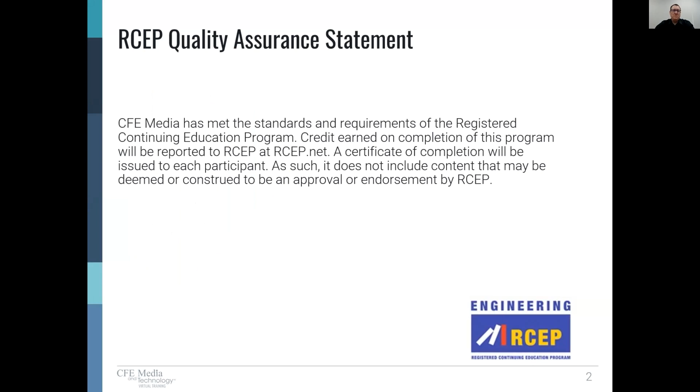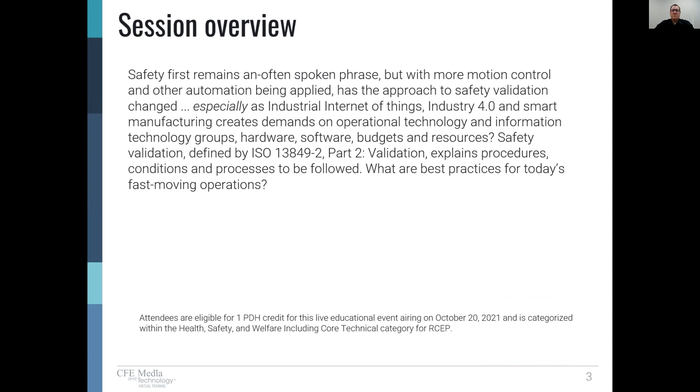This session is designed for technicians and engineers who want to understand safety as it relates to industrial automation and motion control, validation, procedures, processes, and best practices. Here's a list of learning objectives. We'll touch on these in today's presentation.

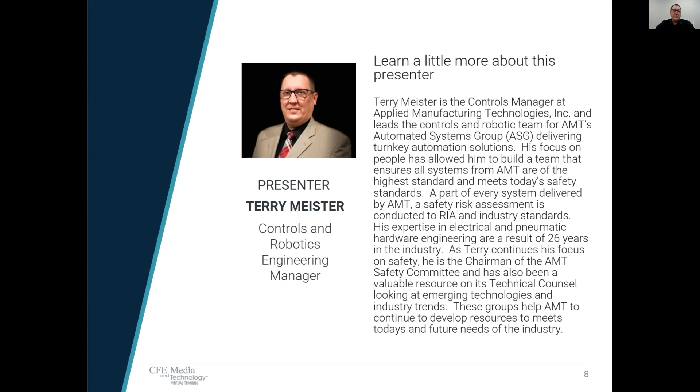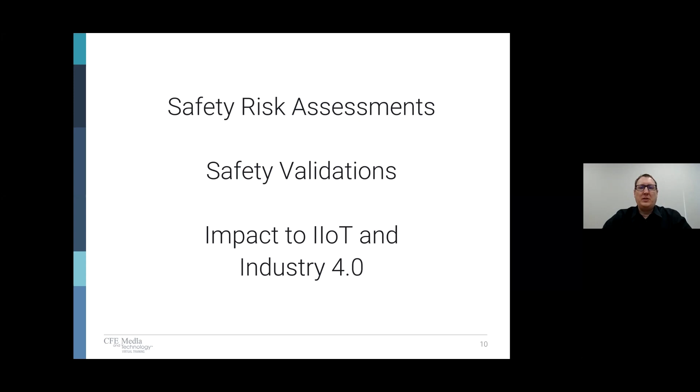Today, we'll be discussing three main topics: safety risk assessments, safety validations, and the impact to IIoT and Industry 4.0. So to get us kicked off, first, let's talk about the safety process to begin with. When we want to maximize safety, really we find that there's 5 different categories that people fall into, or companies, if you will. They're complacent, combative, which is not a good thing, competitive, cooperative, or collaborative.

What do we mean for a company that does this? Well, the first one, complacent. Really, most or all of the people at that company don't recognize safety as an integral part of the process. And what we can see in today's society, there's very few companies today that would fall into category 1. Most understand safety to a certain extent and understand the need for it.

We think of a combative company. Now, they're quick to dismiss or argue that safety is a hindrance. So it's stopping the process. I still have a product to make and I need to get it out the door quickly. Well, those companies are few and far between as well. Now, competitive. When we look at a company as competitive, they're quick to discount safety within their own process.

Now, most companies fall within the 4th or 5th category. The 4th one, cooperative, which is good. These ones understand the need for safety. They may not understand totally how to implement it, but they understand that there is a definite need. And the 5th one, where we all want to be, collaborative. They understand the benefits of safety, and they are in full implementation on their systems and machines.

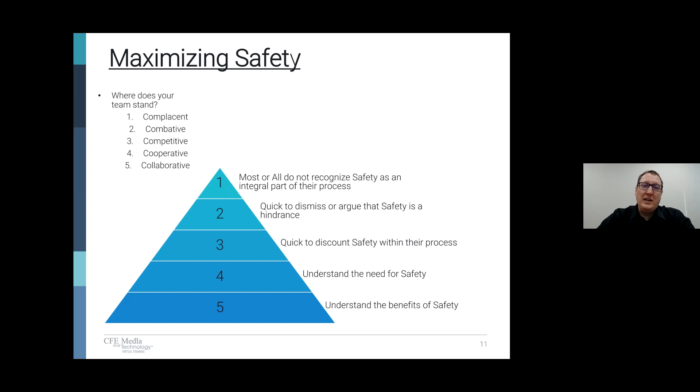So as we discuss the first part, safety risk assessments, why are they important? We're going to discuss who should be involved in them, the terminology that goes along with risk assessments, the procedure that needs to be followed, and documentation.

Now, you're going to hear the word documentation several times today, and we're going to emphasize it because when it comes down to risk assessments and validation, documents are an important key that all of us need to keep in mind. And really, it's the proof that we've done our due diligence to make sure systems are safe.

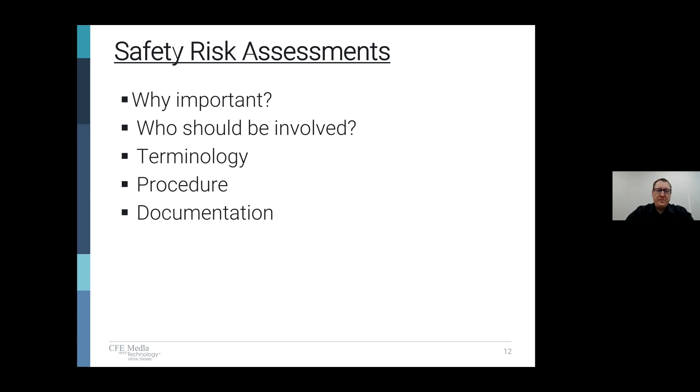We think about safety not just as a piece of the engineering or a piece of that machinery. We need to think about it as a whole solution in the life cycle of a system or a machine. Here's 5 steps that we put together that we try to follow on all systems that we want to engage in. The first step is the risk assessment. That's going to give us an understanding of what level we need to protect the operator or someone interacting with that machine from.

Then we move into the functional safety. So that's the design phase, when we're designing mechanically, controls-wise, electrically. What functional safety needs to be there? It needs to be discussed in step 2. Step 3, we need to mitigate the risk. There's a risk on many machines and systems. How do we mitigate that so we're keeping people safe?

4th, this is a very important point, but many companies miss it: validation. A lot of companies have the risk assessment, their design, their mitigation. It's very clear. They're intentional about what they do. But when it gets to validating, well, by that time, the system needs to be out the door, and they really don't validate the system. We'll discuss why that's so important further in this presentation.

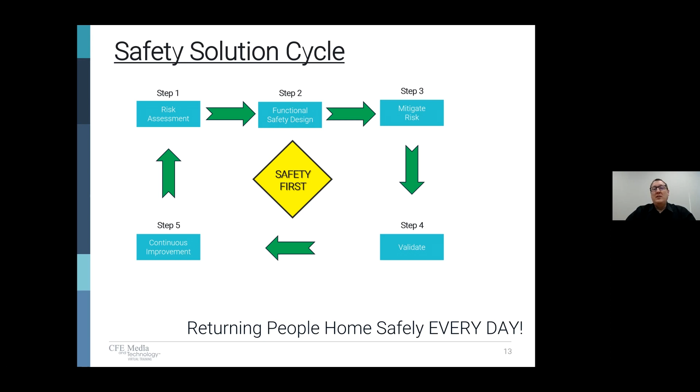Really, our goal is all the same, isn't it? If we're here listening to this, we're concerned about sending people home safely every day so that they can live an enjoyable life and that they don't have consequences from what happened at work on a particular day.

A lot of people wonder, though, about the risk assessment. As we get into the details, you'll see it's in-depth and it takes time. So why is it so important? Well, this enables us to have a systematic analysis and evaluation of the risk associated with that system over the whole life cycle. Now, when we say whole life cycle, remember, a risk assessment isn't just for an operator. We need to look at the risk associated with a machine or a system, all the way from when we think about building it on our floor, when we're programming it, when it gets to the customer, once demolished. All of those things need to be considered in a risk assessment over the whole life cycle.

And it gives us an approach to be able to do that methodically so that we can catch all of the risk. Really, it also allows for an impact on supporting the coworkers. The more that we get workers involved in a risk assessment, the more buy-in that they have. And again, the goal is to send everybody home safe and sound. That risk assessment gives us the first step in being able to make a safe solution.

Who should be involved in the risk assessment? Oh my, this is a big debate sometimes, because the more people you get involved, the more money that is spent on it, right? However, the more people you get involved, the more buy-in you have. Sometimes we'll see a designer who's in charge of the risk assessment, but he's the only one involved. Really, that's not the best practice. The best practice is to have anybody that's going to be involved in the design or the implementation or anything revolving around that system involved. So the integrator, the machine builder, the designers, the end users, even the operators and the maintenance personnel.

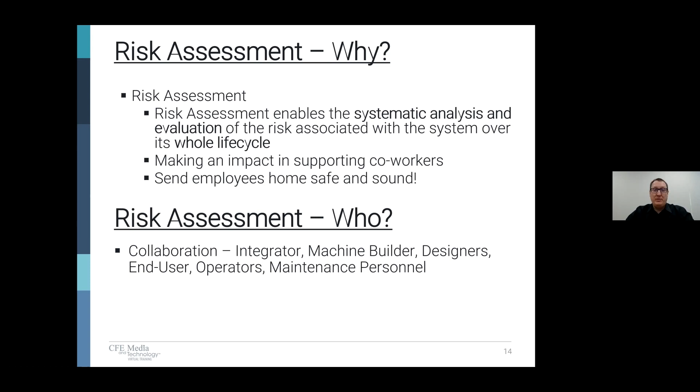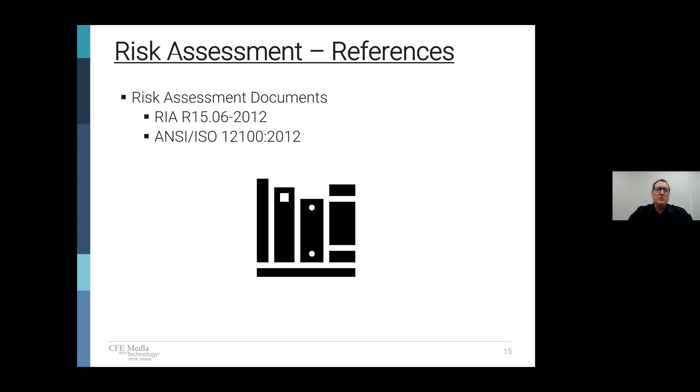When we think about risk assessments, we have standards that really give us principles along the way so that they can guide us to building a safe system. Two of those are the RIA R15.06-2012, that's for the robots and the robotic systems, and ANSI ISO 12100-2012, which also gives us a basis for risk assessments. So those two documents, if you don't have them, we encourage you to get them because they're going to give you those principles that you need to base your risk assessment on. How do you build it? What principles are used in doing so? Those are going to give you the guidance that you need.

When we think of the strategy for our risk assessment and risk reduction, we think of it as 5 different pieces that we need to work through. We see here A through E. First, A, determine the limits of the machinery, which include the intended use and any reasonably foreseeable misuse thereof. That's an important catch, isn't it? If we think of just an operator interacting with it every day, we can protect that. But what about the reasonable foreseeable misuse?

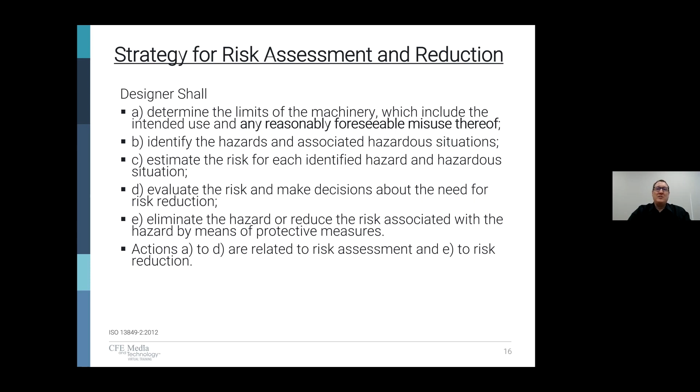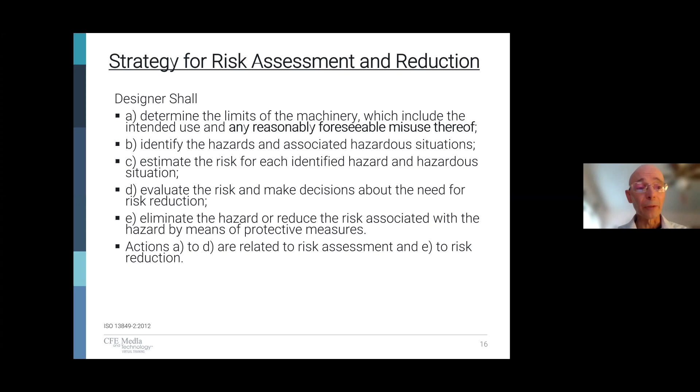Terry, there was a 10-second spot there where you dropped out. I'm not sure why that happened, but if you want to back up to the beginning of this slide and start again, that would be great. No problem. The last time I stopped a speaker for that, it was just on my end, and it recorded just fine. So this may be for naught, but we don't want a 10-second gap. No problem. So I quit sharing, sorry. All right. I'll go back one. Come on. You're doing great, by the way. Oh, thanks. Okay, yeah, there we are. Wait a second. There we are.

Okay. So when we think of the strategy for a risk assessment and reduction, we have really 5 different ways that we do this as we look through the process. We have A through E on the screen. So when we think about A, determining the limits of the machinery, which include the intended use and any reasonably foreseeable misuse thereof. Now that's an interesting catch, isn't it? When we think about reasonable foreseeable misuse, what does that mean?

Well, imagine you have a plant and all of the gate switches are the same and they require the old hard key that fits in every single gate switch. Now, if an operator or a maintenance person has one key that can fit every switch around that whole area or a plant, well, really that's reasonable foreseeable misuse. So we need to protect against that, don't we? We want to make sure that if someone intended to, they could not easily bypass a safety device.

B, identify the hazards and associated hazardous situations. That's an important one. We're looking at what are the dangers there. C, we need to estimate the risk for each identified hazard: what is the risk level? And D, we're evaluating that risk. And then we need to make decisions based on what we see for the risk reduction.

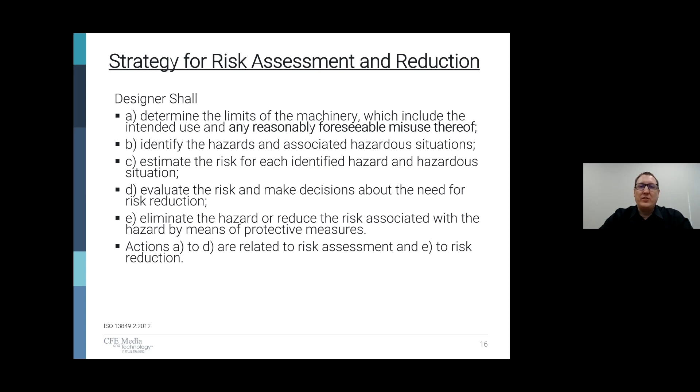And then E, we're eliminating the hazard and reducing that risk by means of protective measures, like safety fences, safety devices, laser scanners. There's a lot of different safety devices that can do that. So actions A to D are really related to the risk assessment, but E is related to the risk reduction. So what does all that mean? This is kind of straight out of the specification of ISO 13849-2. How do we interpret that?

Well, in this slide, we see those 6 steps in a little more detail. Step 1, determining the limits of that system. We need to identify the equipment and the intended use and reasonably possible misuse of that equipment. That seems sensible. We're walking through the process. How is the operator or maintenance person interacting? Step 2, we need to identify those tasks or hazards where they're interacting with that system. Step 3, we need to evaluate and assess the risk. So we look at a task or hazard in step 2, and then the risk involved in it. How badly can a person be injured?

In step 4, we want to identify the risk reduction countermeasures that are going to make a basis for how we protect that operator. In step 5, we mitigate that risk. We put the learning from step 4 into practice and mitigate it with those countermeasures that we decided on. And then step 6, we verify that the risk meets the acceptable level. What does the acceptable level mean? We'll discuss that in just a few moments.

But really, this is the life cycle of a risk assessment that we want to keep in mind. And it's good to have this each time we start a system. We want to make sure as we discuss a risk assessment that we're doing each of these steps. It'll help us get in the habit of being able to think and reason on these principles.

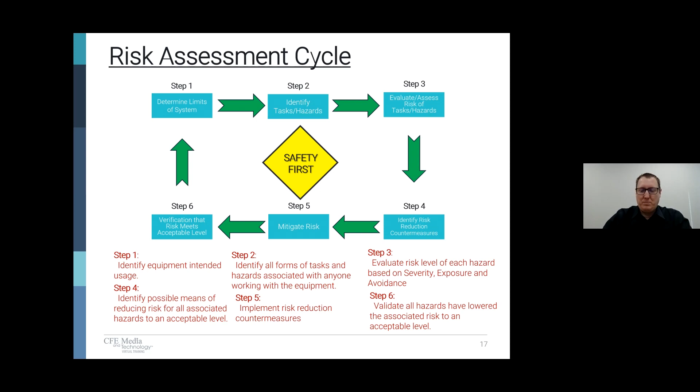These are those 6 principles, again, that we're following. And as we mentioned, who needs to be involved? We see on the right side, resources and input we kind of already discussed. We want the end user, the operators, the maintenance. Understand though, even on an engineering side, we want more than just the mechanical engineer or designer. We want controls input. We want simulation input. We want the programmer. If there's software, we want input from him. All of these can be part of that nice group that we're coming and collaborating on this risk assessment.

Now, we also want a knowledgeable safety officer, right? Because really, if we have a lot of people that don't have the experience of safety just in a room discussing it, they're not going to understand how to apply the mitigation. So we want someone who is an expert in safety that's going to help us get to that next step of providing a safe system.

Always keep the tools handy. We mentioned 2 of those specifications, but also understand the specifications do not give you the documentation you need to fill out as you work through a risk assessment. It gives you the principles and standards that you need to create that document out of, or you can purchase risk assessment software as well. But you still need the expert because he's going to help you put the input into that document or that program that gives you the good output, that gives you what you need to meet as far as a risk level.

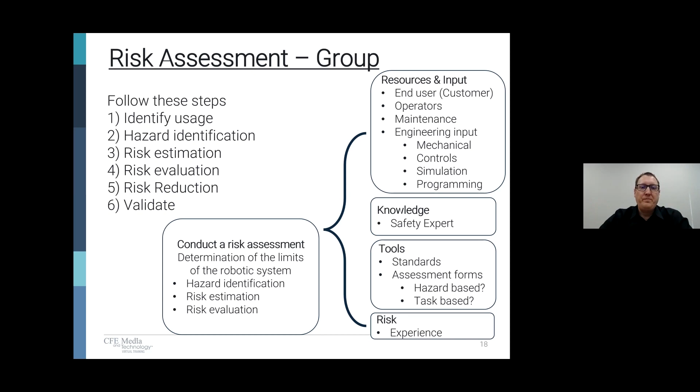I work for a robotics company. So we've taken the RIA and built our risk assessment off 1506. We decided to use a task-based risk assessment. And there's some terminology that we want to discuss before we show you the ideas and some paperwork that we've created that'll help you understand the process that needs to be taken. First, we've mentioned it several times, the task. Yeah, that's a piece of work that's done or undertaken. That's a given, right?

The hazard. Now, understand the difference between the hazard and the risk. The hazard is actually the potential source of the harm, or that piece that's going to create physical injury or damage to your health. The severity. Now we need to look at, if we come in contact with that hazard, how badly are we going to get hurt? Are we talking about a pinched finger, or are we talking about a broken bone? Or, of course, the worst thing that could happen, death.

What about the exposure? This is an estimated incidence of the operator being in the presence of that hazard. So an operator may interact with that hazard maybe once a day, maybe a maintenance person once a year. Maybe an operator is interacting with that hazard 60 times a minute. All of this is taken into account when you're looking at your risk assessment. What about the fifth one, avoidance? Now that's our ability to sense and elude the hazard if we're in the situation where we need to. How fast can we look at and react to it?

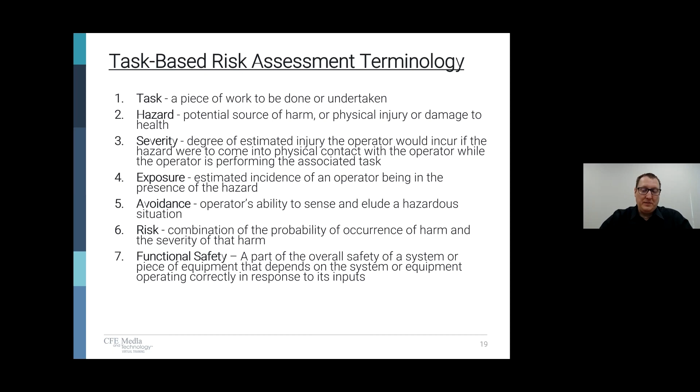So now we're going to discuss some of the documents that we've created that help us walk through a risk assessment. And again, as a company, you'll either need to create the documentation or you'll need to purchase a program that helps you do so. But either way, you need the background knowledge and understanding of the principles. So we start with a cover sheet. Think of someone that hasn't seen the risk assessment yet, but understands the idea of the system. They pick up the risk assessment that you've done, and we want them to understand a little bit about the system.

So on the cover page, we define the system and the sequence of operations for them. This is not a detailed system overview or a sequence of operations. It's just a simple basis. If they were standing next to the system, they could pull it out, look at it, look at the system, and begin to understand the pieces. That's where the system overview helps as well.

Again, not detailed, but if we discuss a robot in the system, we want them to be able to see where the robot should be and see it in the system so they can relate the risk assessment to the physical machine. You'll also run into situations where you need to put down notes, determinations, assumptions that you've made.

These are very important because as you work through a risk assessment, there may be questions that come up and assumptions that you've made. Put those down in the risk assessment so the next person that looks at it and reviews it understands what you were thinking when you made a determination.

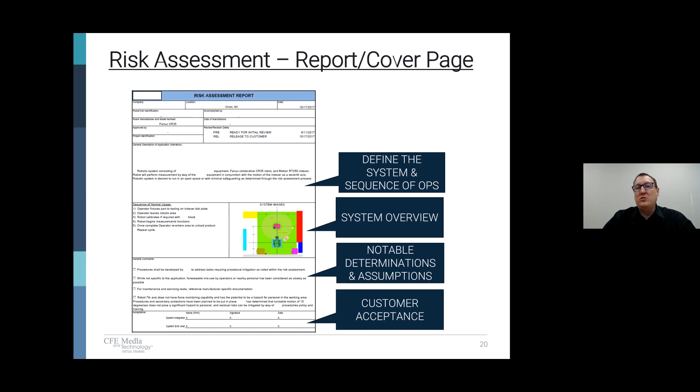The next piece that we look at is our tasks and our hazards. So as we look at a task, there's a lot of ways an operator would interact with a machine, but there's also tasks where, take for instance, a robot programmer. He's going to interact with that system. So in that system, how does he know he's safe? How can he make sure of that?

What are the hazards? When we look at a hazard, we want to make sure that we're looking at it without a safety system. So take for instance, a hazard of a robot. If we put a robot in an empty room without any fencing, and there sits the robot, it's an industrial robot, so it doesn't have any collaborative safety built in. What is the hazard that robot would really have? Of course, that would be high, and we'll discuss that in a moment.

But that's where we need to think of the hazard. Without any safety devices, what would be the hazard of that equipment? Because we're going to mitigate it later, we want to look at the potential hazard and risk. And as we look at the tasks one by one, we walk through. Again, this sounds tedious, but as you build the documentation, you can use it across several machines.

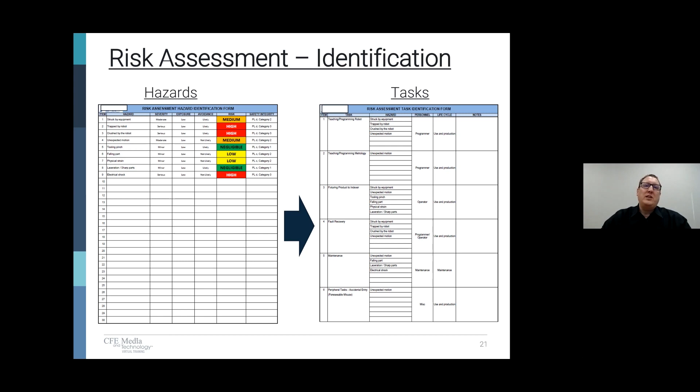Take, for instance, the hazards that we have. We have a list of normal hazards that are associated with robotic systems. So we can pick from those hazards which ones apply to each task. So as you build your risk assessment library, you're going to make it easier on you and the company and all those involved.

Then we move to the evaluation of risk. Now, this chart helps us to understand, looking at the severity, the exposure to the hazard, the avoidance of the hazard, and ends up with helping us understand what our risk level is. So let's take a robot again. I reference robots a lot because that's what I do for a living. But just as an example, take a robot in the center of a room. No fencing, no safeties monitoring anything around it.

What is the seriousness if you were to walk up to that industrial robot that can run maybe up to 3,000 millimeters a second? Well, I don't think you have to reason too hard to bring it all the way down, not minor, not moderate, but we're in the S3 serious category. You are going to get seriously injured. If you run into that robot, well, it runs into you, we'll say. So we have a serious hazard.

And then we look next at the exposure to that hazard. Well, for a robot without any fencing, anybody can walk up to it. So we definitely would say we're at E2, the high risk, wouldn't you? That exposure level is high. So now we have S3, E2 high, and then we look at the avoidance. Well, it's not likely that you're going to avoid something moving 3,000 millimeters a second. So we're going to go with not likely, A2, and that takes us into the risk level high.

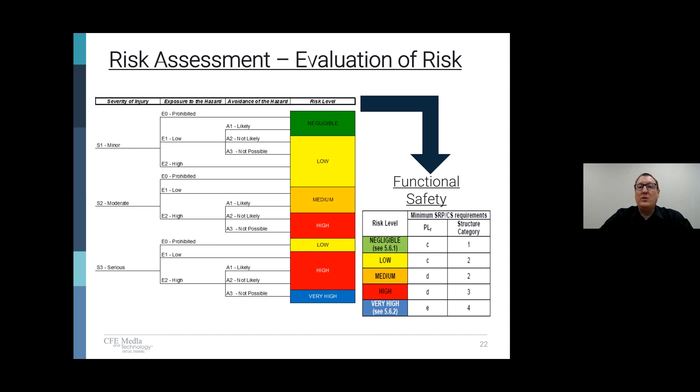Again, now we've evaluated the risk. Now we know how dangerous that is and what we need to protect it against. So next, now that we know the risk, we need to look at our risk reduction. So we look at the initial risk, which we mentioned was a high. We're going to look at countermeasures, and then we come up with the remaining risk.

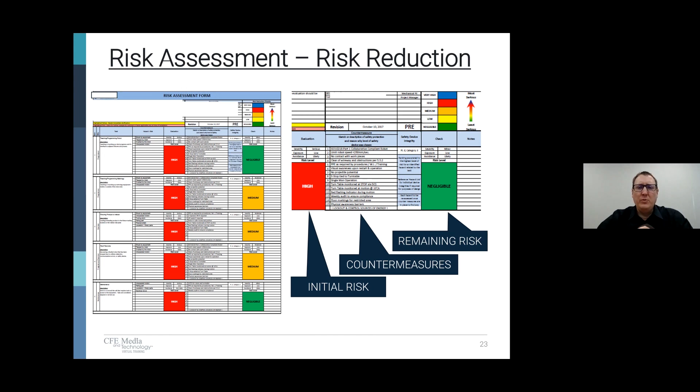So those countermeasures may be a lot of different things. They may be fencing, safety devices, other risk mitigations that we may have. That's going to give us the remaining risk, where we want it low or negligible, so that we know that we've mitigated that risk and that we have a safe system for anybody that's going to interact with it. We'll discuss this a little bit more in a further slide.

Data, when it comes to your risk assessment, is essential. So what data is needed when we're looking at a risk assessment? Well, we need to talk about robot safe stopping times. Robot stop times are imperative, because the second you hit an e-stop and that robot gets a stop signal, there's a lot of inertia moving that robot. How long does it take to stop it?

Safety distance calculations. You have a light curtain or a safety scanner. Those have times that it takes to react to the input signal of that broken beam. Device response times. Yes, a relay doesn't work instantaneously. Again, we're talking milliseconds, but milliseconds matter when it comes to safety. And then you have your software response time. Software is constantly cycling through, so that takes time to respond. So you need to understand and collect all of that data so that you can have a good risk assessment and make sure that you're mitigating the risk in a safe way.

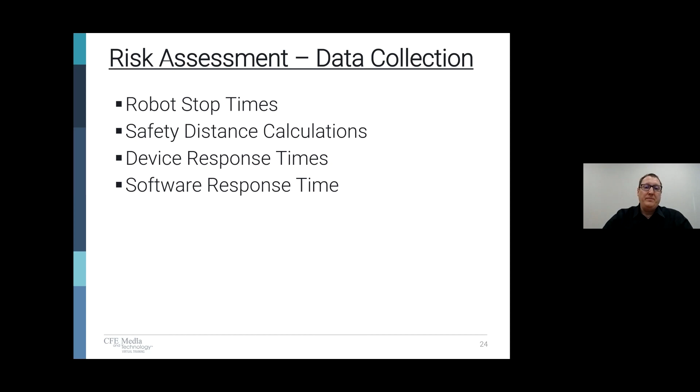Back to that form that we just mentioned. As we look at the left side, we see our task, again, and the hazards associated, and in evaluation on this, we get to a medium, but we want to negate that to an even lower risk level. So take the example of someone teaching the robot. Under the countermeasures, what kind of countermeasures do we use so that we can make sure that their risk is lowered? Well, if a robot is in teach mode, it is limited many times to 250 millimeters a second, which is a safe speed for us to avoid. So that's one thing that we can do.

Another way that we can mitigate that risk is single man operation. We don't want more than one person with that teach pendant inside the cell while he's teaching that robot. A 3-position enable switch. If you're familiar with robot teach pendants, they have a 3-position switch. You have to be in the center. So if anything happened, you'd let it go quickly, and that would stop that robot instantly. So these are all countermeasures that allow us to lower that risk and recheck what level we're actually protecting. So we can negate those with countermeasures down to a low risk.

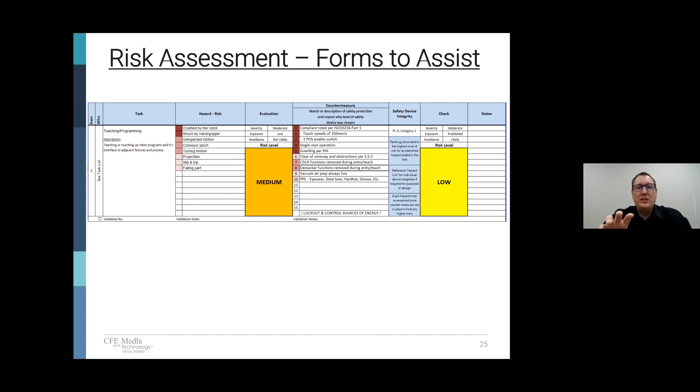So we do that for every task. We go through every task, look at what the hazard is without any safeties around it, what countermeasures we can use, and what the risk is after we've introduced those countermeasures.

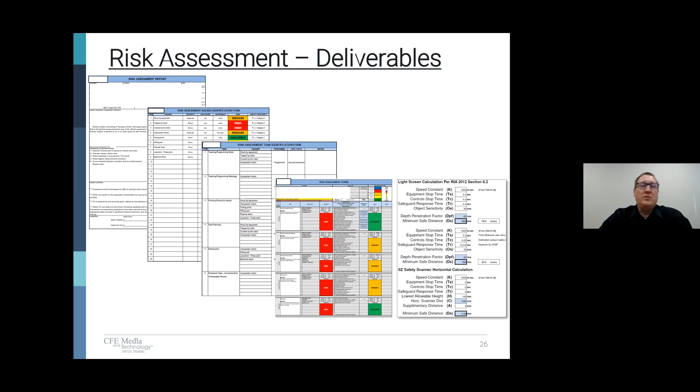Once you're done with all of that, and yes, it's quite a bit, but remember, we're keeping people safe and alive. So once you're done with all of that, you have a nice risk assessment deliverable package. Easy to understand, making sure that you went through every step, and then you get buy-in from everybody. That really helps to have a deliverable for a customer. And also, in case there's any question in the future of how you decided to mitigate risk, you have documentation, which, like we pointed out in the beginning, is very important.

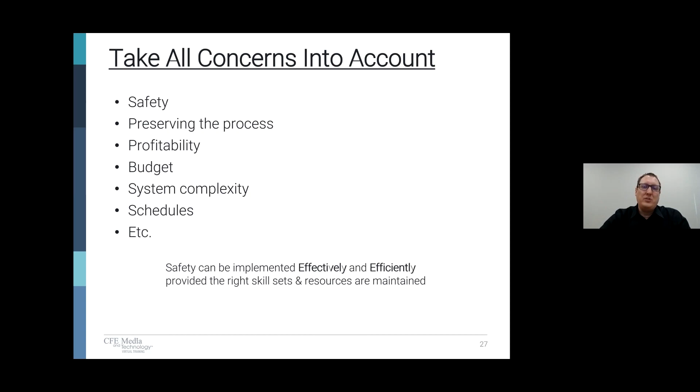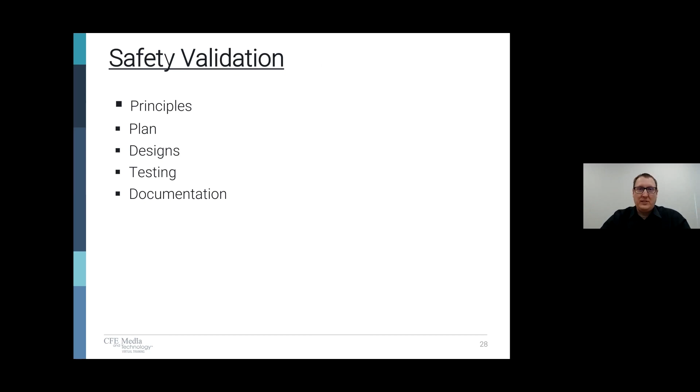So next, we're going to discuss the safety validation. This is one of those last points that we need to cover, isn't it? Now we've done the risk assessment, we've designed it, we've built it. Now we've done the software. Now we need to validate to make sure that we have met that risk level that we were aiming for and negated all of the higher risk hazards. So we're going to discuss 5 points: the principles behind a safety validation, the plan, the designs, the testing, and of course, the documentation.

So a few principles that are in ISO 13849-2 that we need to understand and work within. Here it mentions the validation process shall confirm that the design of the SRP/CS, in other words, the safety related parts of the control system, meet the requirements of ISO 13849-1. So to meet the requirements of that, we need to make sure of several things in our validation. We need to make sure it meets the requirements of the performance level that we mentioned earlier, and meets the requirements of the specified category. Remember where those came from? Yeah, those came from the risk assessment that we had done earlier.

We need to make sure of measures for the control and avoidance of systematic failures. If applicable, we have software. Any safety software needs to meet requirements, and we'll talk about those in a little bit. We need the ability to perform a safety function under expected environmental conditions. We need to think ahead of what the environment is that the system is going into. We may be building it in a controlled environment, 70 degrees, low humidity, but what if the end result is a freezer that this system is going into? Are our safety devices and functions able to work at the temperatures or environment that it's going to be put in at the end result? We need to consider all these things.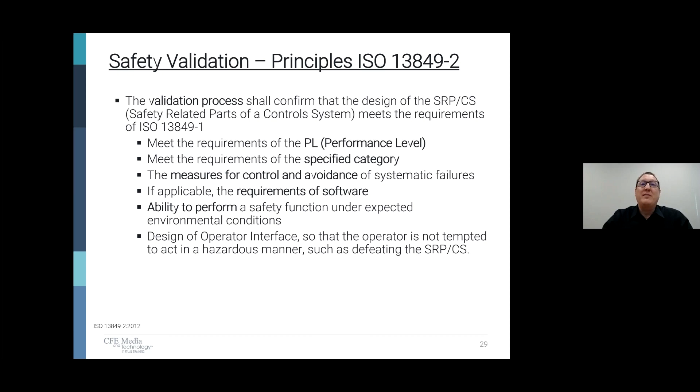This last one is a key. Design the operator interface so the operator is not tempted to act in a hazardous manner, such as defeating the SRP/CS. So if we design a system, like we mentioned, so complex that the operator just scratches his head, and he knows he's got a job to get done, well, he's going to try to defeat the safety measures we put in there. We do not want that at all. We want to make sure that it is a safe system when we're done and that he doesn't try to bypass all of the things that we have put in place. So make it simple.

Also, the safety validation, more principles that we need to think about in 13849-2. The validation should be carried out by persons who are independent of the design. Why is that the situation though? Well, think of this. Personally, I grew up in hardware engineering at first, and I could do hardware engineering all day, even as I got many years in, and then I would take my final design and hand it off to the checker. And what does the checker do? He finds things and notes them all over. When you get it back, you're like, I looked at those drawings for weeks now, and I missed that simple little thing. I can't believe it. Doesn't that happen to all of us?

Well, that's why it's imperative that we have someone that's independent of that design take a look at it for us. That second set of eyes really will find those small things that may be very valuable, that could cause a safety issue, that they can point out to us and fix for us. It just makes sense, doesn't it? The validation consists of applying analysis and executing functional tests that we'll talk about further. Really what that means is we need to have, as highlighted, a validation plan. It's not something that's just a thought at the very end of the system. It needs to be planned out.

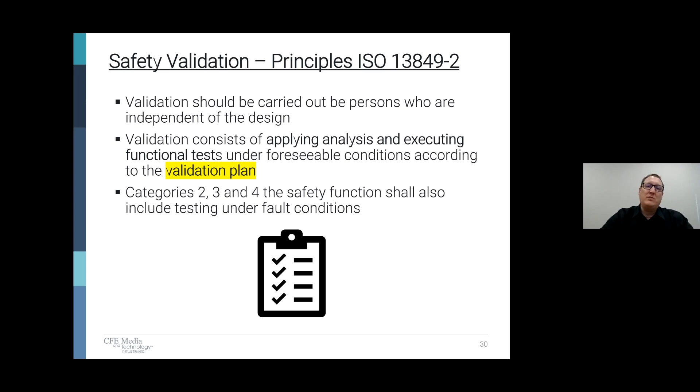If a system ends up determining through the risk assessment that it's category 2, 3, or 4, we need to make sure that safety function also includes testing under fault conditions, because that's the difference of the lower categories to category 2, 3, and 4: catching a single fault failure and reacting to that. So we want to make sure all of those principles are followed when we develop a safety plan, a validation plan for it. Here's an overview from the ISO 13849-2, 2012, of how we can validate.

What is the process that we need to walk through? Well, we see here first, of course, when we start, we're developing, like we mentioned, the validation plan. But what's included in that? Well, we need to look at the validation principles that we just discussed. We need to implement those in the plan. We also need to think about the design considerations, the documents, the reference documents that we may have that we need to look at. One of those being the risk assessment when we sit down to create a validation plan. And also we need the faults list, making sure that those critical faults, that we haven't excluded any, that they're actually all part and built into our validation plan.

Then comes the analysis. So in an analysis, what we want to do is we want to take several different pieces and analyze them separately. Here's an example. The parts we use are important and imperative to a safety function and safety system. For instance, if we use parts that are not rated by the manufacturer, they have not been tested for safety functions, they have not been rated for a certain category level or PL level, and we use that part in our safety system, we're going to be hard pressed to prove that it is actually a safe system and to validate it.

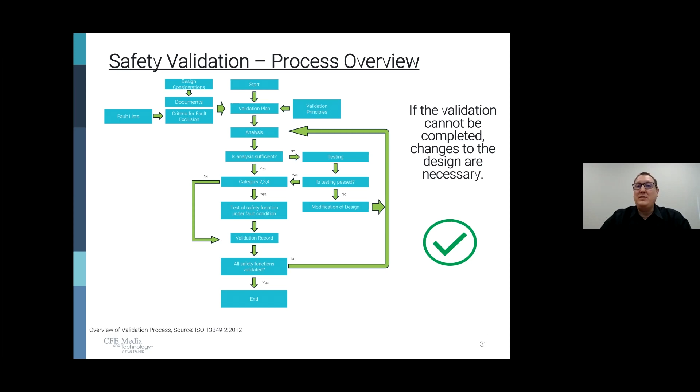When we're making a plan for our safety validation, we have our goals in mind. We want to describe the requirements that we need to carry out for the validation process. So what does that entail? Well, we need to realize the safety functions and specify them. We need to understand the category and performance levels that we're required to meet and validate that it met it. In the beginning, we want to set out to identify the specific documents that we need. Think about the operational or environmental conditions during the testing and testing at the end user.

We want to reference those tests and the standards that need to be applied and who's going to be responsible for carrying out each of these tasks. If we don't put a name to it, odds are it's not going to get done, right? We all know that. We have experience with that. We know someone needs to be responsible and ready to sign off that it's complete so we can verify that we validated correctly.

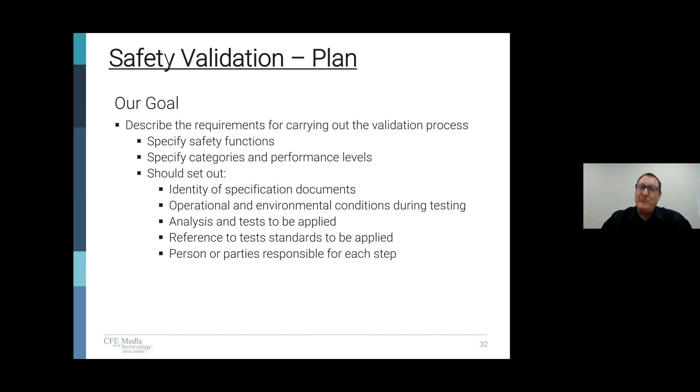What information is needed? Well, here's a few things that we need to think about when we're creating the validation. And really, it varies by the technology we use. If we're doing a design and then we order parts, we'll need documents for those parts. We'll need software if we have that. We'll need that software in front of us. We'll need to understand the category and PL level. And then we need to start to validate the related parts.

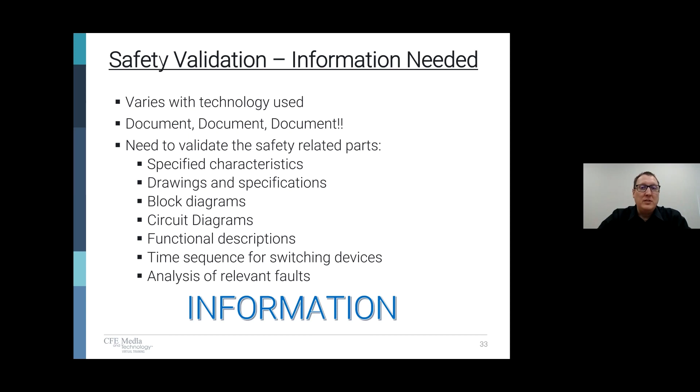Like we mentioned, the characteristics of it, the drawings, the block diagrams, the circuit diagrams, the functional descriptions, time sequence for switching devices, analysis of relevant faults. All of these things, we need that information when we sit down and are ready to validate a system. Sounds like a lot, but remember, this is safety. We don't want to take a shortcut.

For software, when software is used, and it's being used more and more on systems, for the safety side of things, we need to make sure we're validating that as well. This is often something that gets skipped as well, because it's a last thought that people have. They figure if they created the software and they're using good components, well, they just trust that one person that did the software. Is that the best practice? Well, it's probably better to validate that it's right.

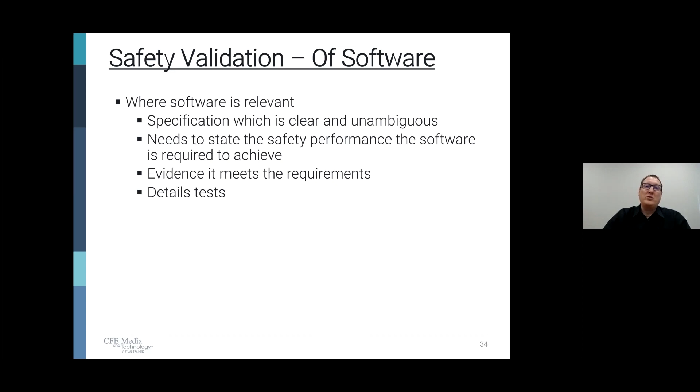So we need to make sure that that specification is clear and unambiguous. The person verifying it understands the intent of the software. Again, it needs to state the safety requirements, the performance level that it needs to meet. Need evidence that it meets those requirements. And that may be a second set of eyes looking at that with you, going through it, helping them, catching those points that we may have missed. And of course, detailed testing of that validation of that software as well.

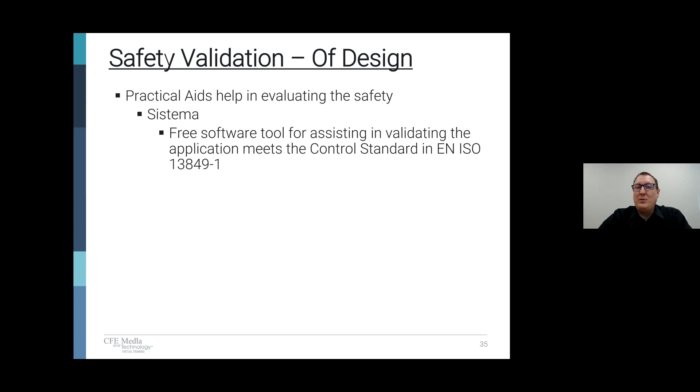For validation, there are tools that can help us tremendously when we're validating. One of the practical aids that we have in evaluating is a software called Sistema. And it's a free software tool for assisting and validating the application meets the control standards in ISO 13849-1. And really, this is actually a free software offered by DGUV, a German insurance association. And as we discuss this a little bit more, you'll see the benefits of having validation tools that help us to do so. Here's some of the benefits.

Sistema allows you to take what risk you're trying to achieve, which is based off the risk assessment, and helps you understand if your devices achieve that and your wiring practices. So it assists with the risk parameters. So it determines and looks at performance levels, the category that you're trying to meet. It takes in the common cause failures of a component, the mean time to failure of components, the diagnostic coverage of components. And now you're probably thinking, if you're not familiar with safety very much, what does all this mean?

Basically, a part, let's take a relay, a safety relay. It needs to be tested for all of these different things that we just talked about. How long does it take to fail? How many times can it actuate before it fails? All of that testing is done to make sure that that device is going to react in a safe state. And then they qualify that. And that's where you get some of the levels that that piece of equipment stands up to. Is it rated for PL d category 3? Is it rated for PL e category 4? All that testing is done.

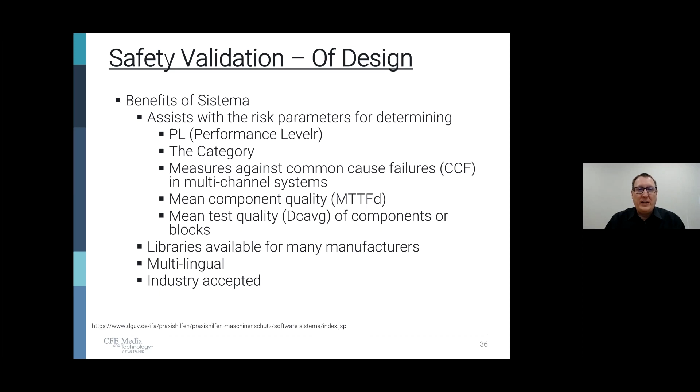So for any of the reputable manufacturers, there's libraries out there to download. It's going to help you to perform that. And it's also multilingual, industry accepted, so people trust it. If they see a Sistema report, usually they trust that that has been validated for all the parts and wiring practices used.

So the safety validation we need to test is our next one. We need to produce the test plan, but make sure that our records cover the basis written into the specifications, such as the name of the person carrying out the tests, the environmental conditions, the test procedures, the equipment used, the date of the test, the results of the test. Make sure that the validation is against the systematic failures, and also of course those faults in case it's a category 2, 3, or 4.

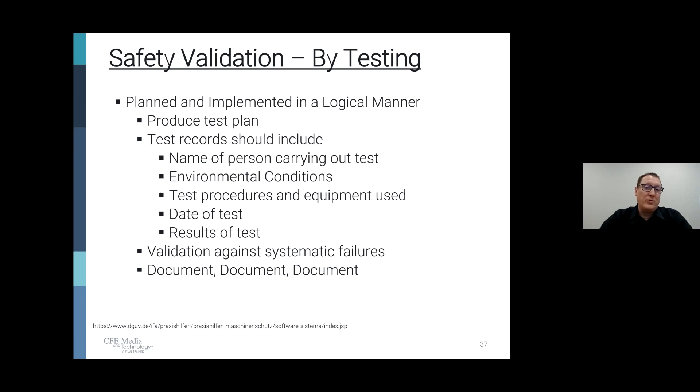Documentation is the key. We've created documentation to do this so that every system that leaves, we have documentation proving that we've validated our systems. Here's one just small piece of a validation plan that we've created. You see that the category 3 PLd is what we need that device to meet, and the testing that goes into it. We'll take, for example, a simple push button.

Here we have an e-stop. So we've already verified that that e-stop meets the correct category and PL level that that device needs to create the safety function based on the risk assessment. But now we're going to physically test it. Some people think going out and hitting the e-stop on the machine, and if everything stops, you're good. Have you tested the faults?

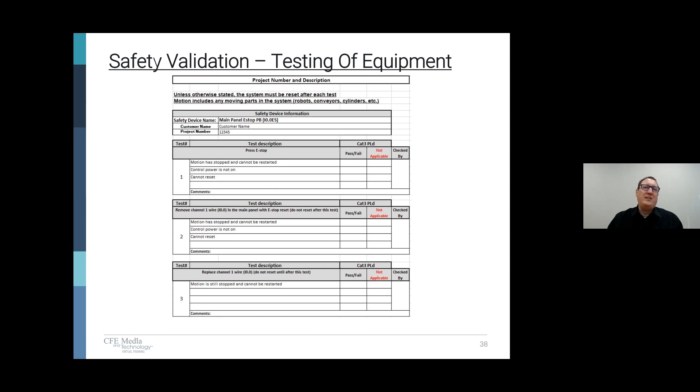What if one of those wires becomes disconnected? Can you prove that that e-stop is redundant? All of these things need to be taken into the validation plan. And you can see that we actually remove each wire, making sure that that fault is caught, that you can't reset the system. Again, a validation plan is the key. Helps when you get to the floor, make sure that your system is safe.

From a software aspect. Now, the safety related software is either embedded or application software, but again, it needs to include certain things, the functional behavior, performance criteria. You need to verify that that software measures up to the performance level of the safety function. That goes back to the risk assessment. You need to measure activities that are taken during the software development to avoid systematic software faults, protecting against it.

Now, for a small system, a review or a validation may be as simple as a walkthrough or review of that software on a small, simple system. Again, second set of eyes validating it. But on bigger systems, you're going to need someone to sit down and validate the software functions, the safety blocks. Yes, tearing each one apart, making sure that they react and are written in a way that is safe.

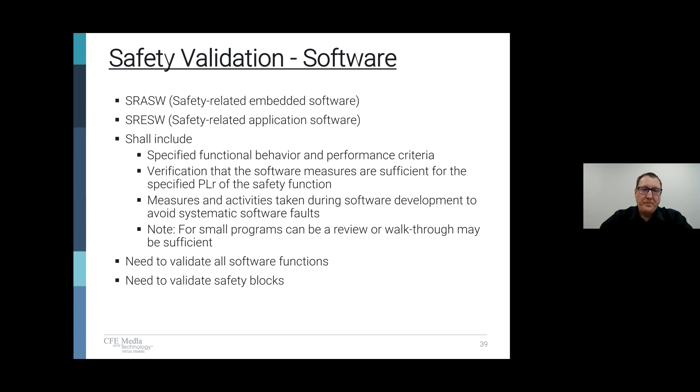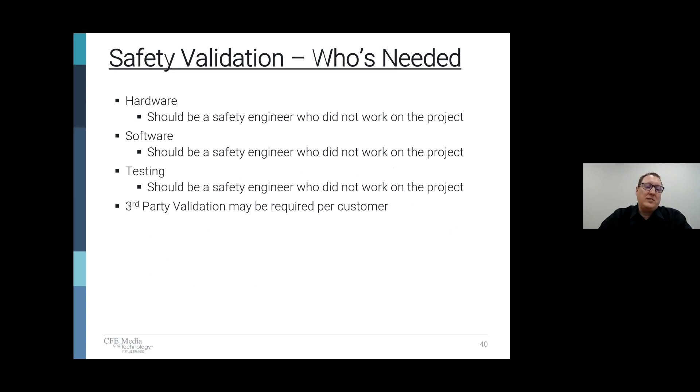So the safety validation, who's needed? Well, you see in the first three here, it's all the same answer. Hardware, software testing. You want, again, a safety engineer that did not work on that project or wrote the software or created the design. You want that second set of eyes. Sometimes people require a third-party validation. That may be required by your customers, but that's not really necessary when it comes to the specification.

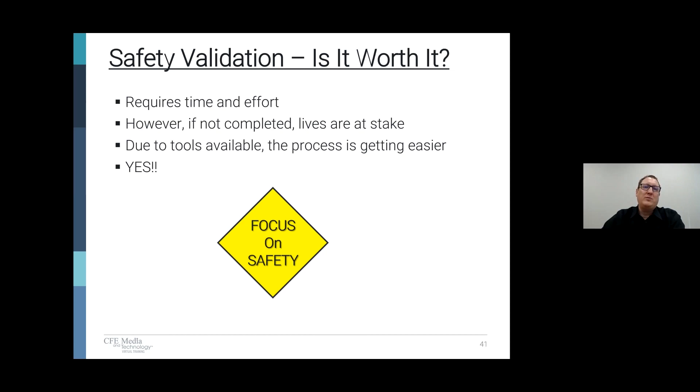So is it worth it? Definitely. It does require time and effort, but it's not complicated. As you continue to learn it, use the tools that are available, it will be well worth it when we focus on safety. So how does the safety validation, as a wrap-up, apply to IIoT, the Industry 4.0, smart manufacturing? How does all that tie together?

Well, as machines get more interface with the cloud, more machines are. At this point, most safety systems are still held on the plant floor directly at that machine and directly with the local PLC controller. But in the future, where does that end up? Well, we can be sure it's going to expand. We need to start thinking and forward thinking about the remote connectivity, the things to consider.

Think about safeties. If they're accessible from the cloud, which some devices allow even today, what precautions are you taking to make sure that someone cannot touch the safeties if they are not on site? Or if it is allowed, how can you prevent any accidents? How can you make sure that safety is handled on both ends of that transaction? Of course, we need to look at cybersecurity, the network protection.

Perhaps you don't have an IT expert on site or in your company. It's not wrong to go out and start discussing that with IT experts at a different company to understand the cautions that need to be thought about, cybersecurity that needs to be investigated, ransomware, hacking, all of these things need to be considered the second you plug an Ethernet cable that goes to the internet to a machine or a system.

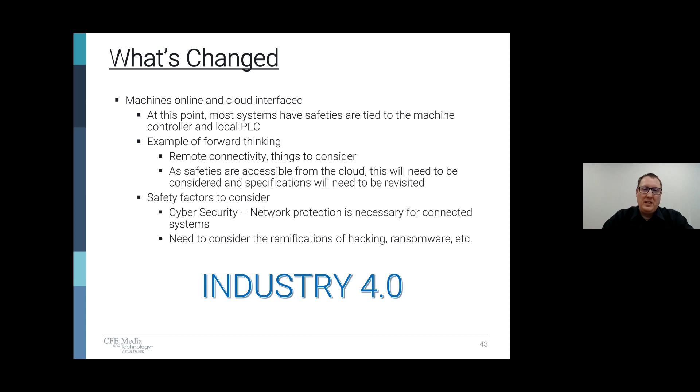What can you do now though? Well, what's your company culture, like we started with? Are you in the 4 or the 5 of that triangle? Does your company culture already implement the existing specifications that are written? We should be. And if we are, we're going to be ready for that next level. As IoT, as Industry 4.0 continue to be defined and the specifications written for these, we're ready to act. Do your research on edge devices and security devices that interact with the internet.

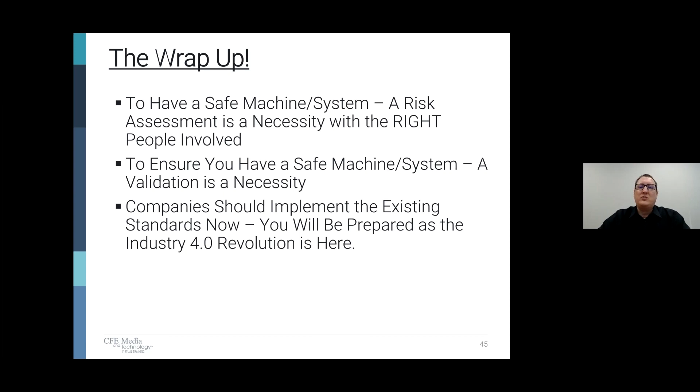Yes, so we covered 3 points. We've looked at the risk assessment. To have a safe system, a risk assessment is a necessity, and it needs to have the right people involved. To ensure that we have a safe system, a validation is a necessity. And what can we do right now? We need to start implementing the safety and the standards that already are here for us and start forward thinking so that we can be a part and prepared for the Industry 4.0 revolution that is upon us.